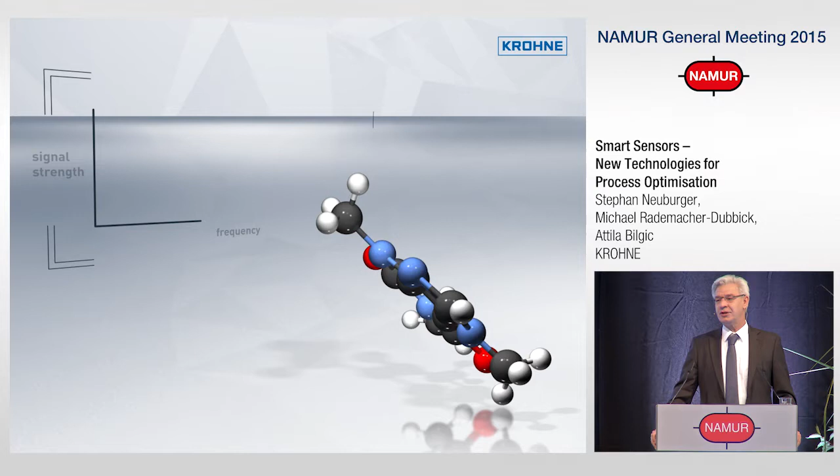In my part, I will present a short history of the development of the KROHNE Group from an individual instrument manufacturer to an international solution provider in the field of measuring technology. My fellow board member and spokesman of the owner family, Michael Rademacher-Dubbick, will then present our corporate philosophy. In the third part, our Chief Technical Officer, Dr. Attila Bilgic, will outline the technology of tomorrow in which we are conducting research and which are developing specifically for your application. You can already see an example of this in my background.

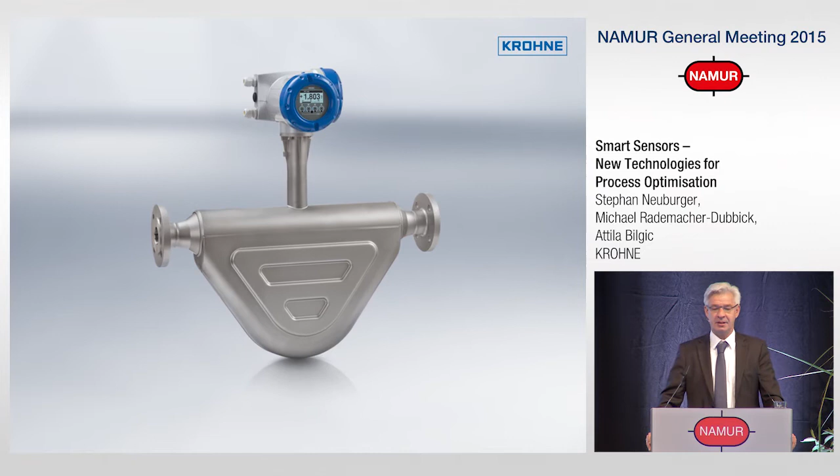I'm very excited about what lies ahead, and I'm confident that today's presentation will be very enriching. Attila certainly will surprise you. But one thing I can tell you already is that it has nothing to do anymore with only VA flow meters. Smart sensors, new technologies for process optimization, hidden behind this title, is actually the future of sensors for the chemical industry. But before we look into this future together, I would like to briefly talk about how we arrived at where we are now and how the subject of smart has already become well embedded within KROHNE.

The sensors of tomorrow will provide diagnosis, they will recognize information and network with each other intelligently and draw the right conclusions. Smart sensor technology is to a large extent application-oriented sensor technology, and you will hear the word application a lot from us today, because applications are what drives us.

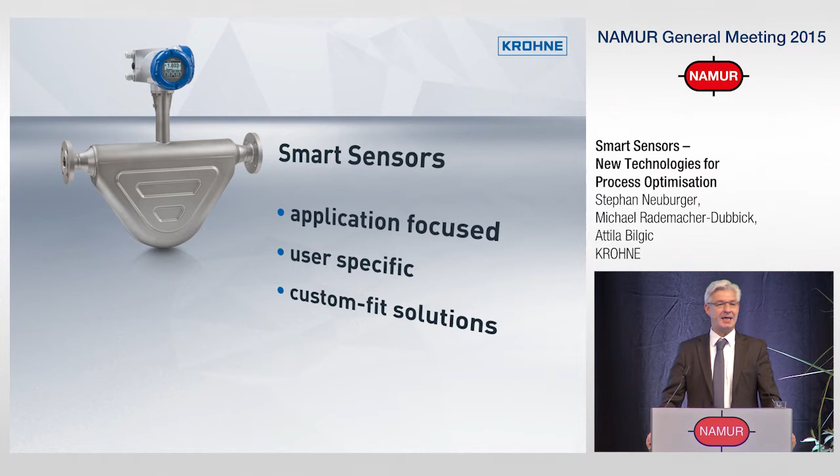From the beginning, our focus has always been geared towards the application and process of our customers. What makes our work so very interesting is the continuous creative exchange with our clients about their requirements. To find the custom-fit measuring solution for your application inspires us again and again, and we are known to be not afraid of very complex challenges.

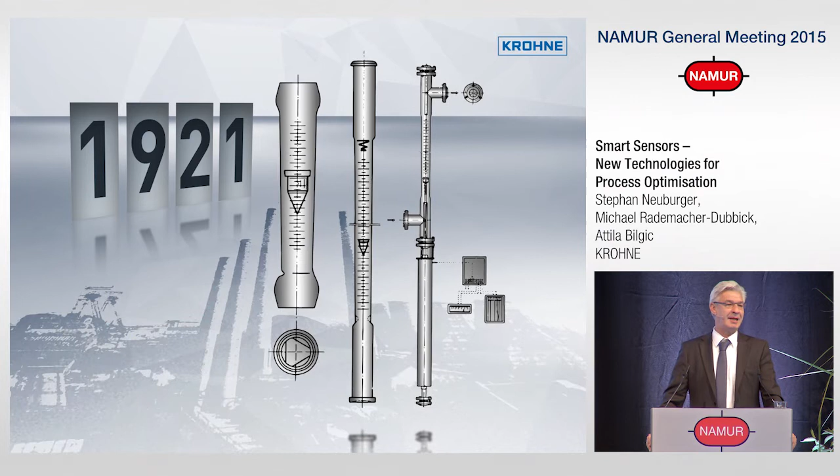We started in 1921 with the manufacture of measuring devices for hardening furnaces used by companies from the metal industry in the Ruhr area. After the upheavals of the Second World War, KROHNE was initially a small business when Christian Rademacher-Dubbick joined the company and gave directions for many decades. At this time, Christian was a passionate artist.

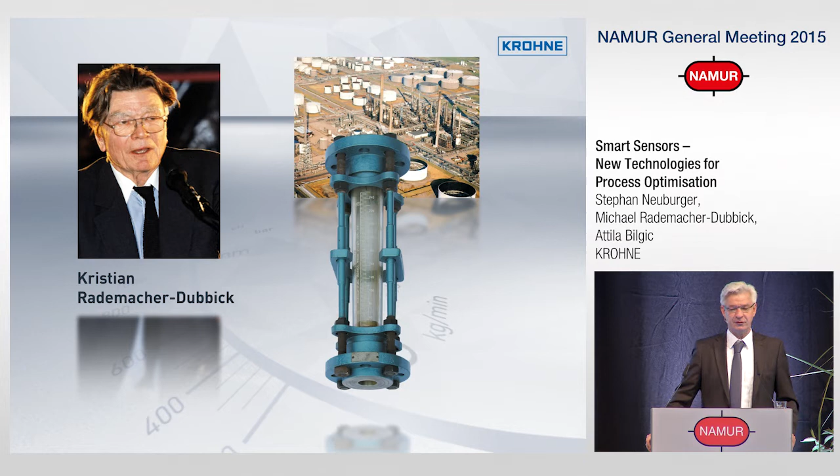However, he decided to swap his passion from painting with the technology of measurement. He dealt closely with the chemical industry in Germany, which in the 50s was experiencing a strong growth, and he wanted to understand what exactly was needed in measuring technology. KROHNE had to grow. Amongst others, BASF and Bayer became important customers and important companions.

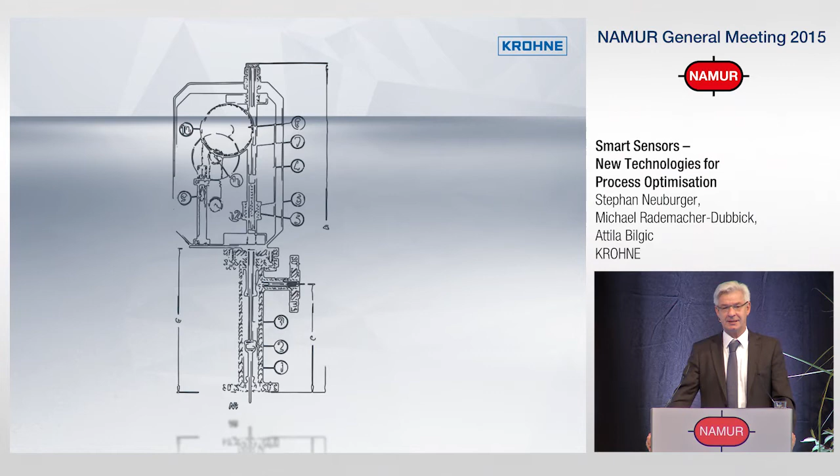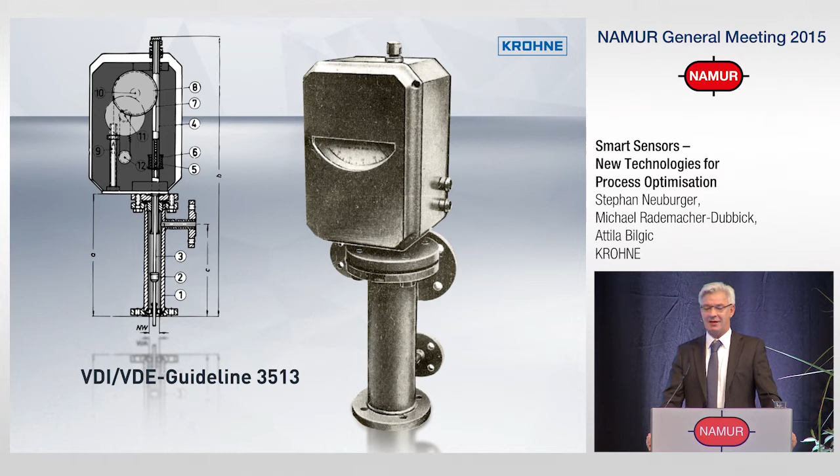We first implemented their requirements for standardized, safe measuring devices by our all-metal VA flow meters with magnetic coupling. The calculation procedure developed by KROHNE was a basis for the VDI/VDE guideline 3513. The principle of magnetic coupling also helped us to expand our product portfolio in the area of level measurement technology with a magnetically coupled float system under the license from Farbwerke Höchst.

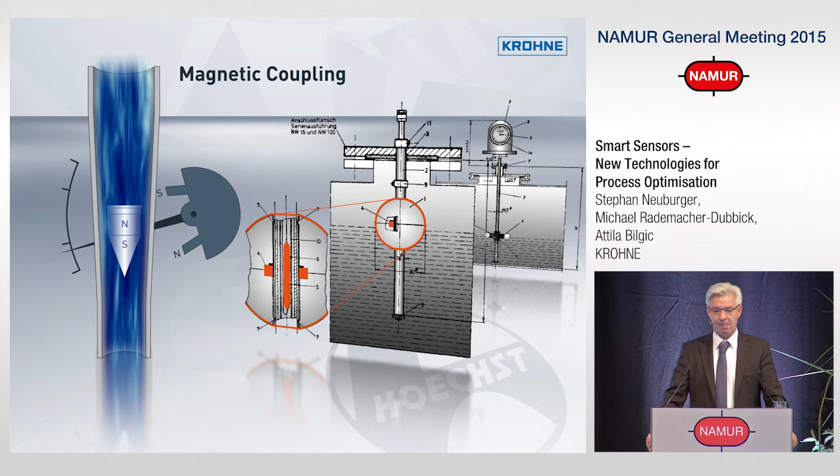The first electrical measurement principle that followed was our electromagnetic technology. Under the name KROHNE Altoflux, we took our first steps towards industrial standard electromagnetic flow meters. These devices contained no moving parts for the measuring in the volume flow, had no constriction, no pressure loss. Nothing like this had ever existed before.

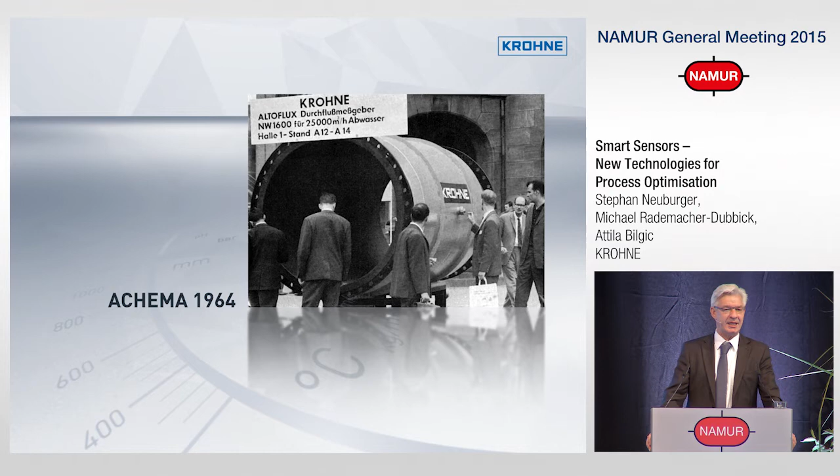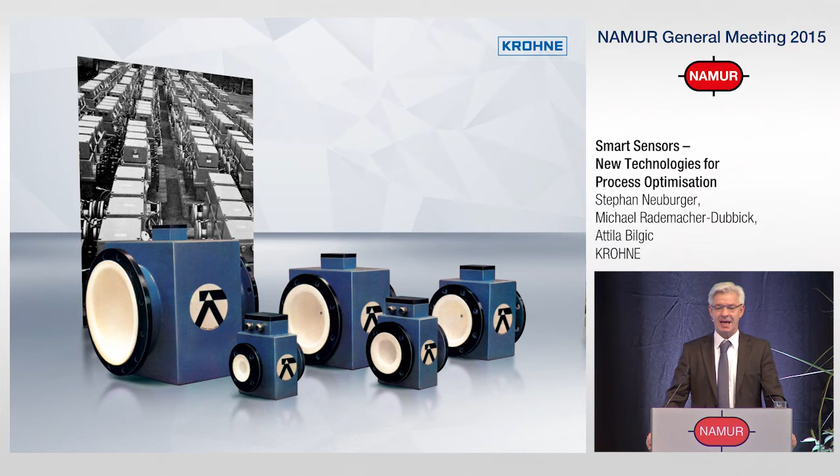The fundamental question was whether such a device could work. The industrialization of this technology was so difficult at the time that KROHNE wanted to give up the project on several occasions. With great tenacity, after 10 years, we finally got the technology under control.

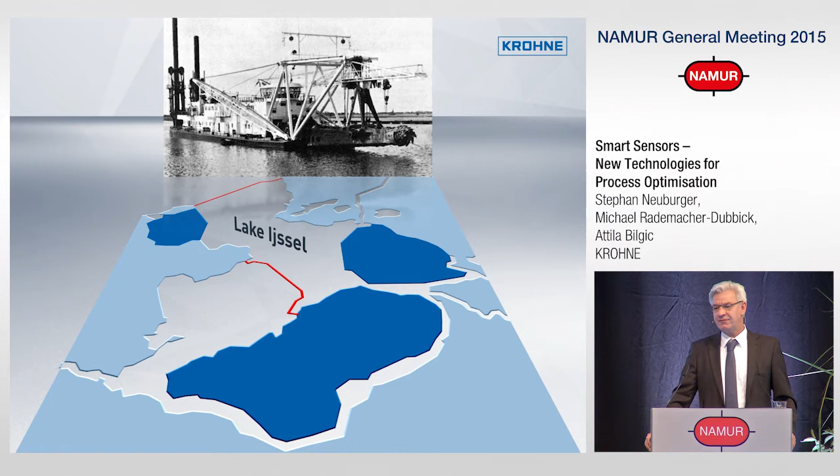The trust we received from our customers through the first orders for magnetic inductive flow meters helped us considerably. The Netherlands urgently needed a technology for land reclamation and construction of polders, which could measure the mixture of water, sand, and partly very large stones without being destroyed in the process. We successfully solved this application.

Since the market of KROHNE at that time was 60% concentrated on the chemical sector, especially the German chemical sector, our first task was to adapt the new technology for our traditional customers. The requirements in the chemical sector were a lot more diverse.

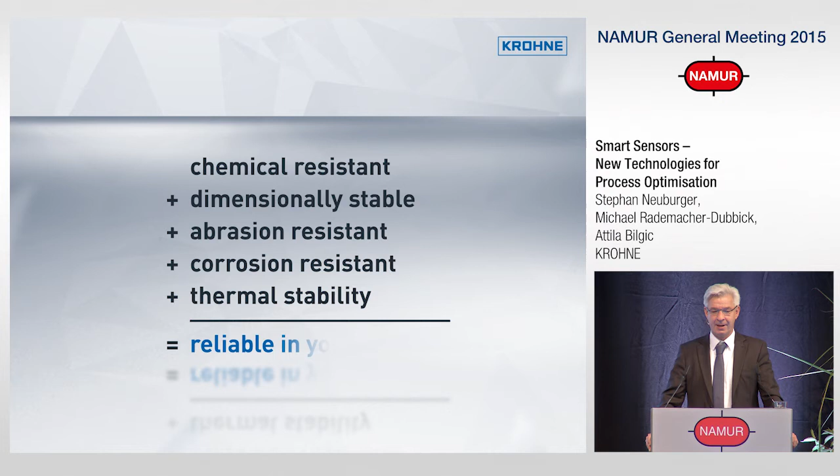We developed transistor amplifiers, the pulse DC field, large and small diameters, pressure ratings, various Ex concepts, and a huge number of liners. We wanted to give our clients the ideal measuring device for all their needs: chemical resistant, dimensional stable, abrasion and corrosion resistant, thermally stable, in sum, reliable in your process. The idea to use industrial ceramics as a measuring tube material came from KROHNE.

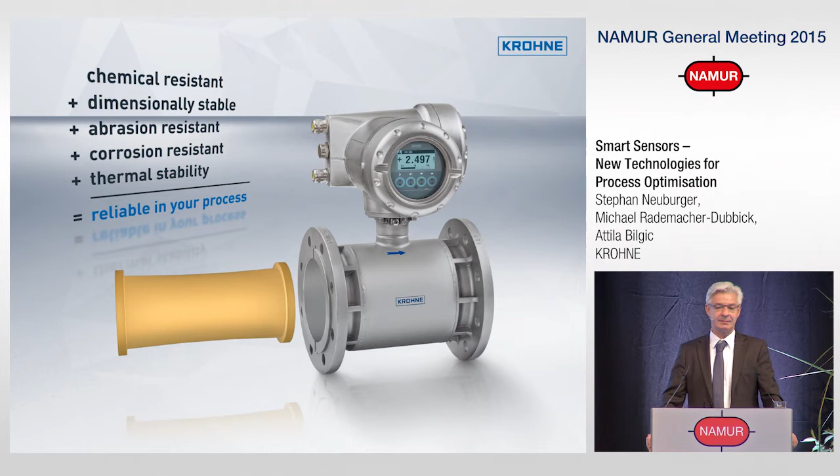Parallel to the chemical sector, we also acquired a broad range of application knowledge in the petrochemical industry, the food sector, and the water and wastewater industries. We have consistently researched new technologies and integrated them into industrial measurement technology, and we have often pioneered the industrial implementation of further physical effects.

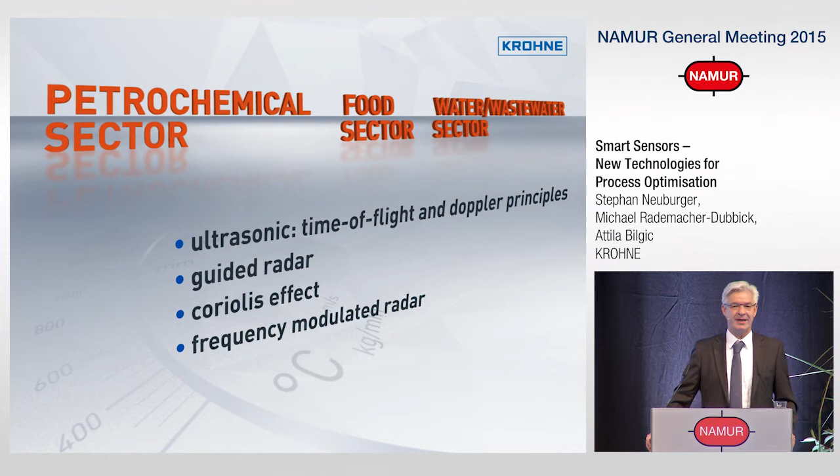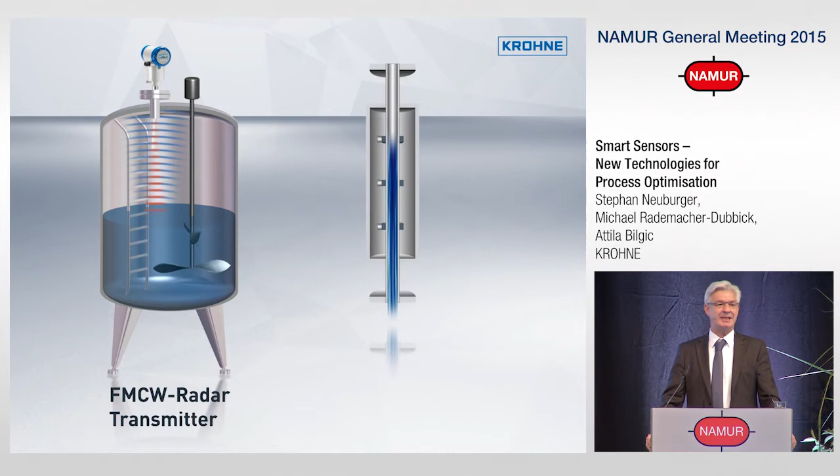Non-contact, frequency-modulated radar for level measurement in difficult vessel geometries, or the direct mass flow measurement using the Coriolis effect with a single straight measuring tube, are just two examples. From the mechanical design to the electrical signal evaluation through the measurement algorithm, we have complete command of our technologies.

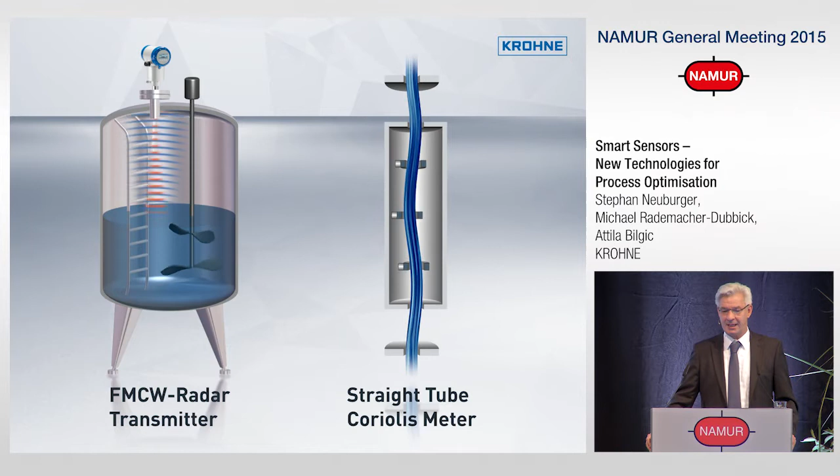In addition to the development of these technologies, the second important task was the internationalization of our company. One important motivating force for us was the high level of investment from the NAMUR member companies abroad and their wish for a reliable local partner.

Sometimes the wish was expressed in a very direct way, and I would like to give you an example from my own first-hand experience. In 1996, I was a region manager responsible for South America. At the invitation of the German Trade and Industry Association, I was invited to a dinner in Sao Paulo, where I had the pleasure of presenting KROHNE.

The evening went well up to the moment at which one of the audience members, a manager of a large German chemical group, took me aside. He made it very clear to me that simply exporting devices was not enough and that business in South America would not be successful this way.

We would need people on the ground who are involved in the application and are able to establish long-term relationships with our clients. Following the principle of local business, local people, we have built up our global development and production sites, as well as our sales organization in North and South America, India, China, and Russia.

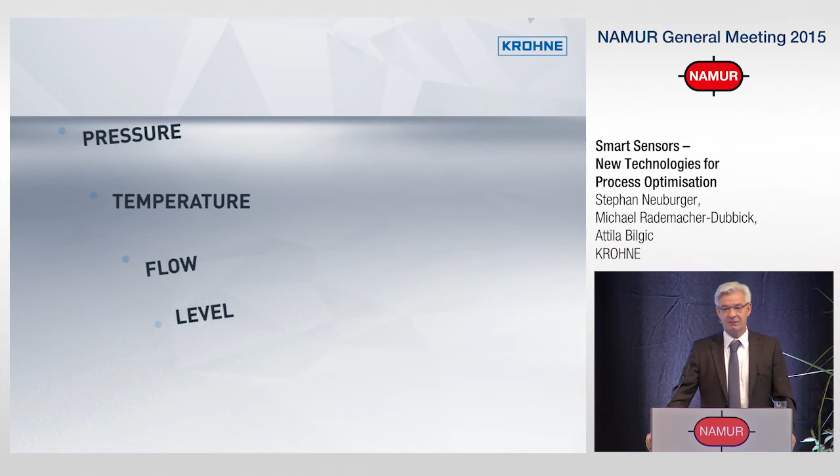4+1, that means process analytics are placed on the same level as the main parameters mentioned before. We have mastered all of these technologies in depth. Only in this way can we guarantee the implementation for your application and the integration into your process.

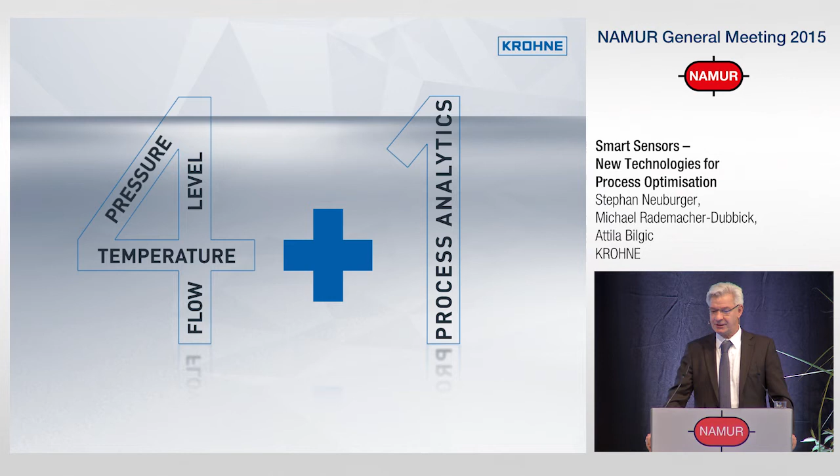With the development of our process analytics portfolio, we have continued to focus on the requirements of our customers. Process parameters such as mass flow are now supplemented by substance composition. We measure inline, online, and the results are real-time available for the process control system. To gain material-specific information inline or online is a substantial competitive advantage for chemical companies.

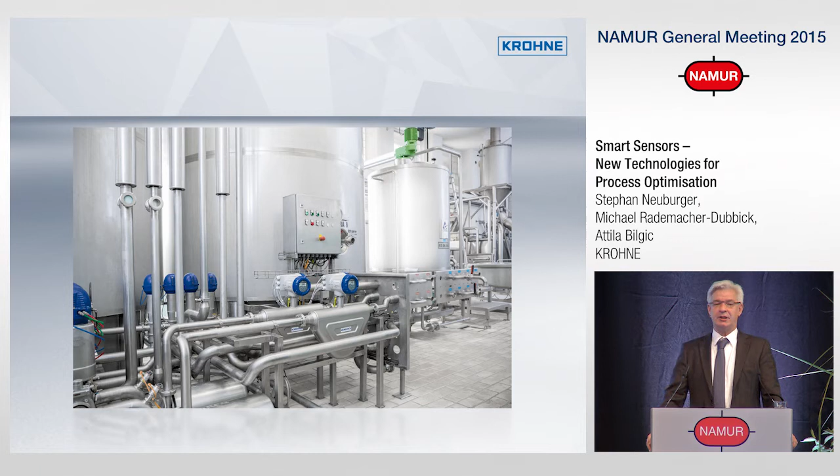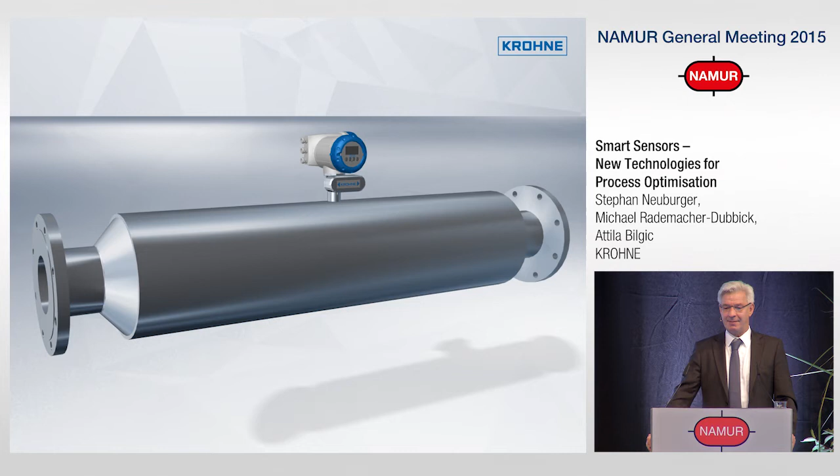We can see that the market demands this from us, and we will expand our involvement in this area in future, as you will see in Dr. Bilgic's presentation. Next to a first-class product portfolio, you also expect from us a complete and appropriate measuring solution. I would like to give you two examples.

In the first example, we develop a measuring run as a solution for the custody transfer loading of rapeseed oil. We supply everything shown here: the gas separator, control valve, mass flow meter, piping, the dosing control, and the custody transfer relevant project management, complying with the regulation of the MI 005, as well as the commissioning, training and documentation.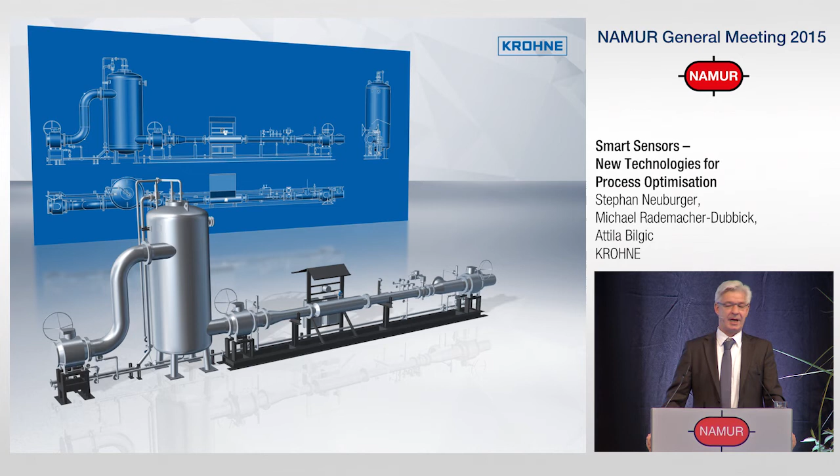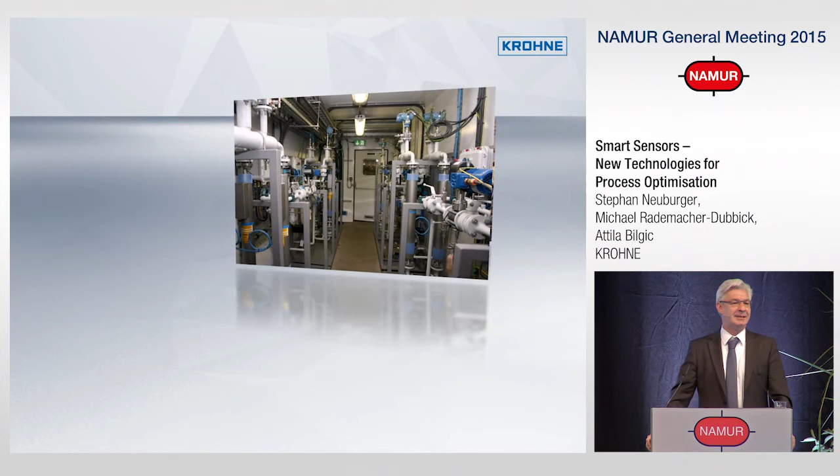The second example comes from the oil and gas industry. Next to excellent measuring devices, they also expect a complete metering solution: a turnkey, skid-based measuring system, mixer, analyzer house, custody transfer flow meter, actuators, and the integration of measured data into the customer's ERP system. We have the expertise to advise our clients early on in the planning and design stages of this solution.

Furthermore, we support our clients in the decision-making process while determining which application is subject to custody transfer or fiscal regulation and which is not. And if applicable, we support you in the custody transfer approval process.

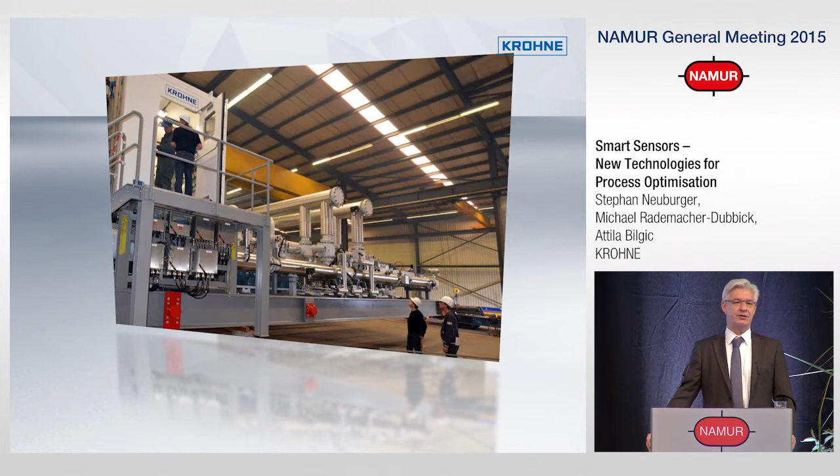In the implementation of the European Measuring Instrument Directive, I just mentioned the MI-005 as an example. KROHNE supports its customers in the total process assessment and upgrading of existing installations according to national metrological regulations. In doing so, KROHNE is becoming a service provider beyond the plain measurement value.

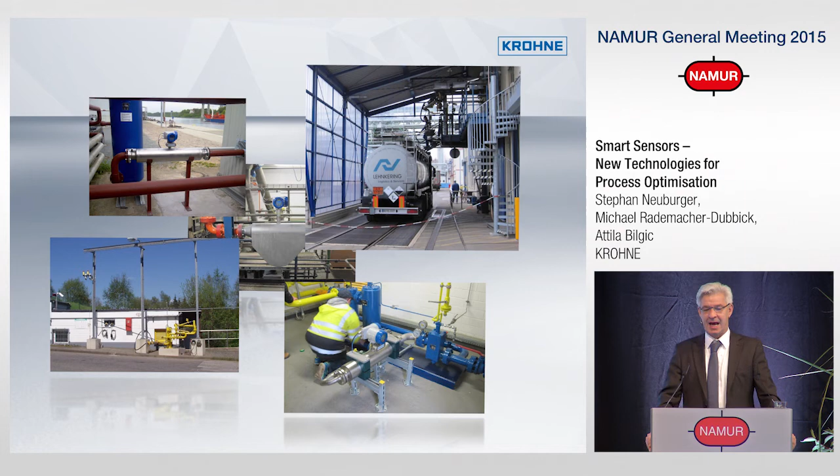Whether that be for a process measuring device or for a complete system solution, precisely understanding and implementing customers' requirements is our task. Safety, availability, flexibility, and efficiency, the core needs of the chemical industry, are second nature to us in the way we think and in the way we act.

We show you how you can simplify safety concepts within your plants and how you can ensure higher plant availability through diagnostic and predictive maintenance to minimize downtimes. Or, for example, in multipurpose plants, devices that can be used for a wide range of applications are necessary to utilize the maximum flexibility of that plant.

Today, a standard device needs to cover a temperature range between -200 to +400 degrees Celsius, be made from high-quality material without special versions, and at a competitive price.

Our contribution to an efficient process is not only limited to the provision of one measurement data, but on the structured deployment of large amounts and varieties of information out of your process.

Ladies and gentlemen, you want to have access to in-process data and trends, to product properties and information on the various phases and transition states in a safe and reliable way. The measurement technology solution for all of these tasks in future will be combined into a single measurement module.

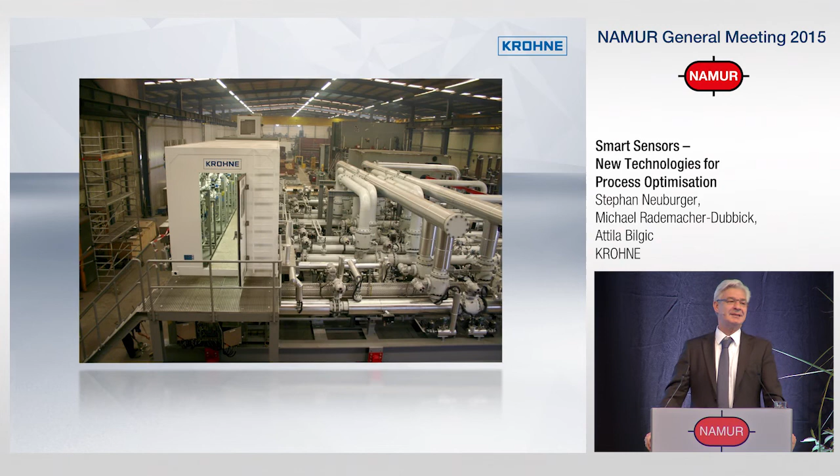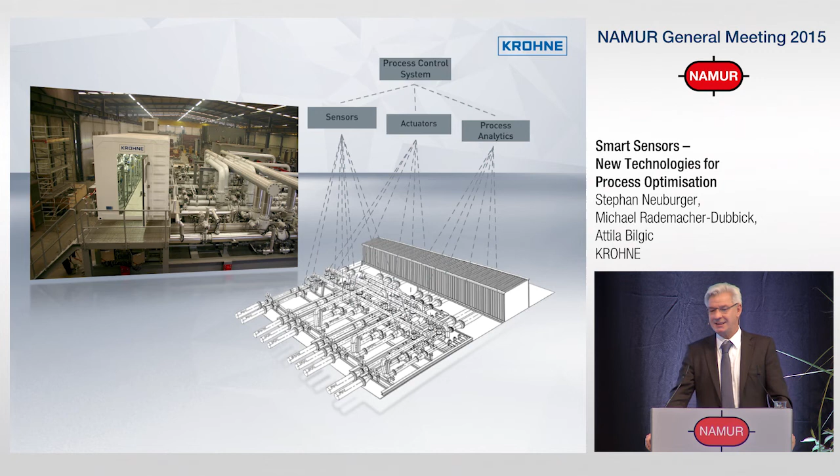The future of process automation is an instrumentation and control module which intelligently connects sensors and actuators combined with the necessary process analytics. The forefather for such a module is a system solution that combines various functions with one system.

This path directly leads us into the world of Internet of Things, or Industry 4.0. If we reduce such a system in size and interlink this function intelligently, we create a smart instrumentation and control module.

The functionality of such a module can only be guaranteed by smart sensors. Sensors with reliable diagnosis and intelligent linking between sensors, actuators and control systems are the future. Whether the process control system in its present form is still required is an entirely different question.

Another example of a smart system is our leak detection and localization system. This system continuously compares the measured data of the inline sensors in the actual pipeline with a mathematical model of this pipeline. Any deviation from the model is detected as a leak or as safe via pattern recognition software.

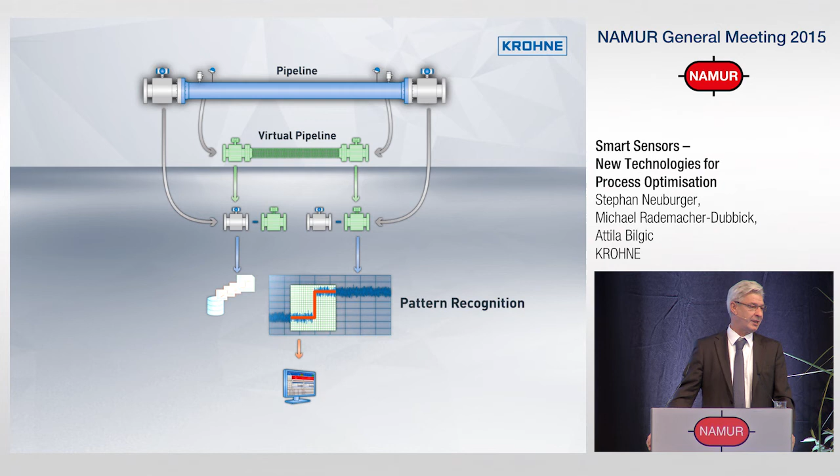The intelligent combination of sensors and software works so well that the false alarm rate of the system is practically zero. This system is already providing completely autonomous intelligence which, according to the wishes of the customers, can be integrated into a control system or remain standalone.

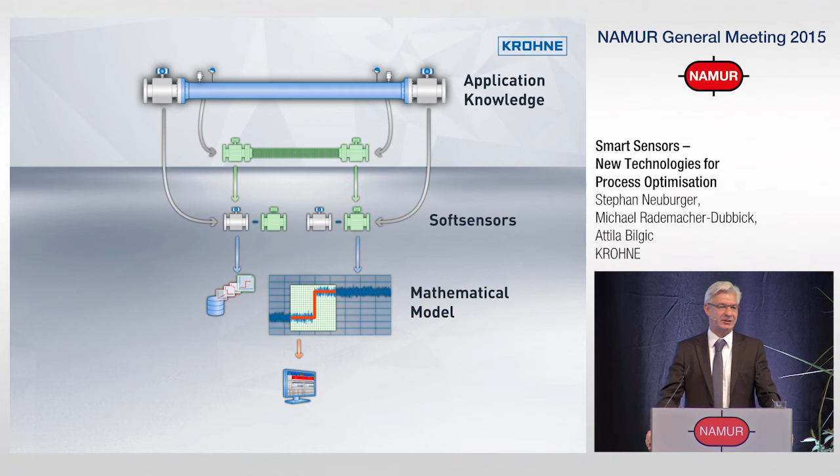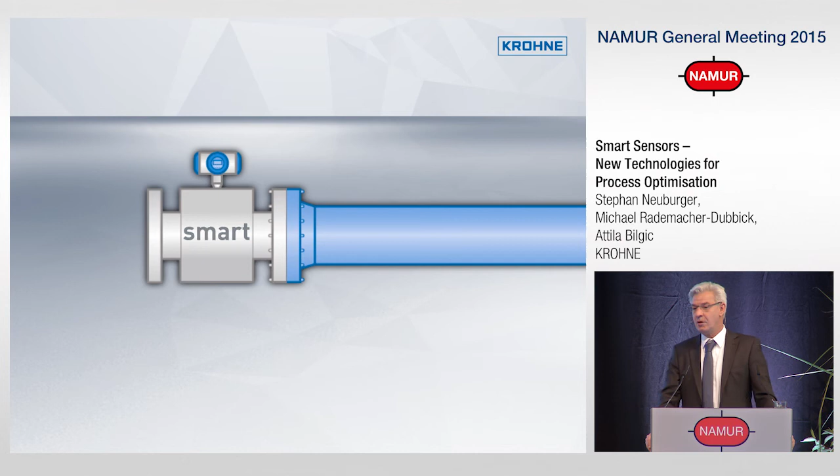This intelligence, the mathematical model as well as the pattern recognition, can be integrated into our sensors in whole or in part. In this respect, our measuring technology is already smart. Such an interlinked system of soft sensors and mathematical models of the process control, combined with the necessary application knowledge, will set the future in process automation.

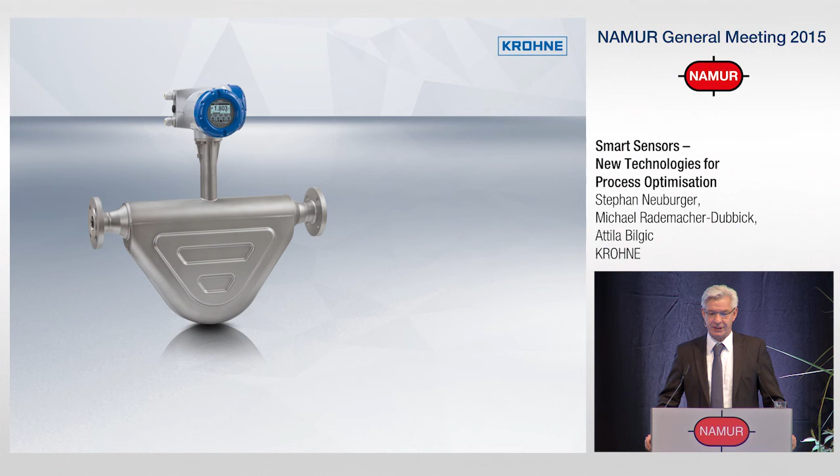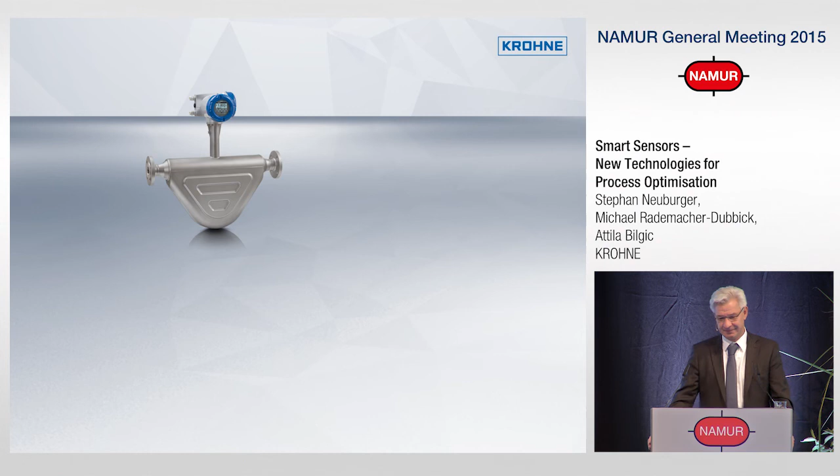At the same time, smart sensors must fulfill exactly the same requirements as a so-called regular process instrument: reliable measurement data under the most difficult conditions that meet international standards and regulations, comply with all safety aspects, and integrate modern communication technologies.

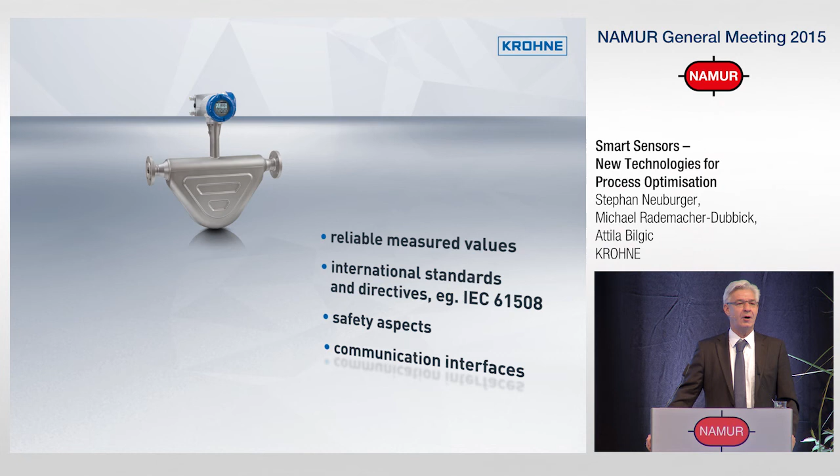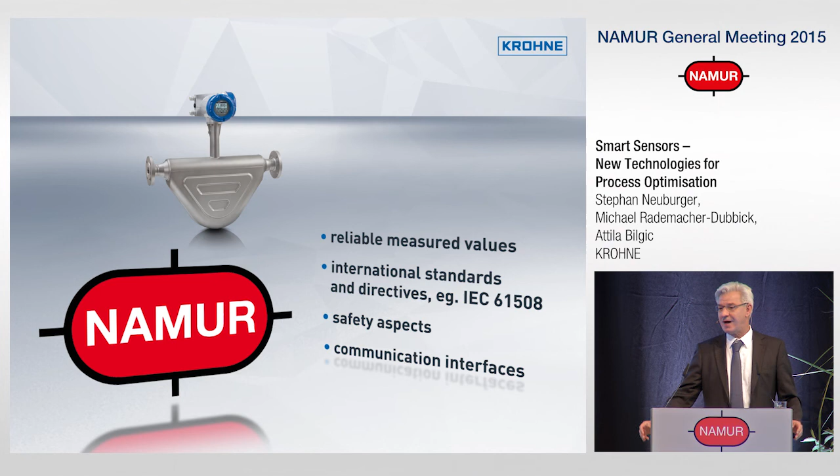In this context, we welcome the standardization efforts by NAMUR, because only uniform, open standards will lead to increased efficiency of your plants. Nonetheless, the number of NAMUR recommendations remains quite impressive for us.

We are already implementing key aspects from the NAMUR roadmap, Process Sensors 2015+. For example, in the measurement of spatial distribution of process variables in your pipelines and vessels using tomographic methods. Interface detection through inline process analytics and the use of new concepts are also important.

Examples are single-use sensors or swarm sensors. We are very much looking forward to the revised version of the roadmap that will be presented by Dr. Michael Maiwald later this morning.

The entire field of smart sensors, in conjunction with the paradigms of chemistry, requires a huge effort on our part as a measuring technology manufacturer.

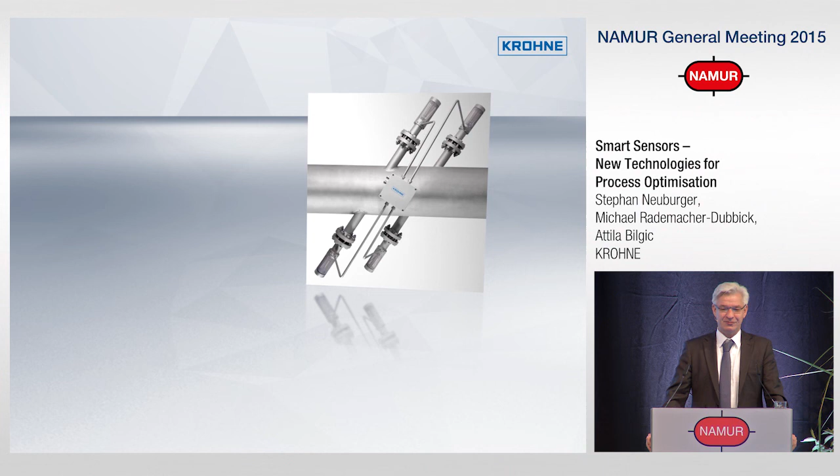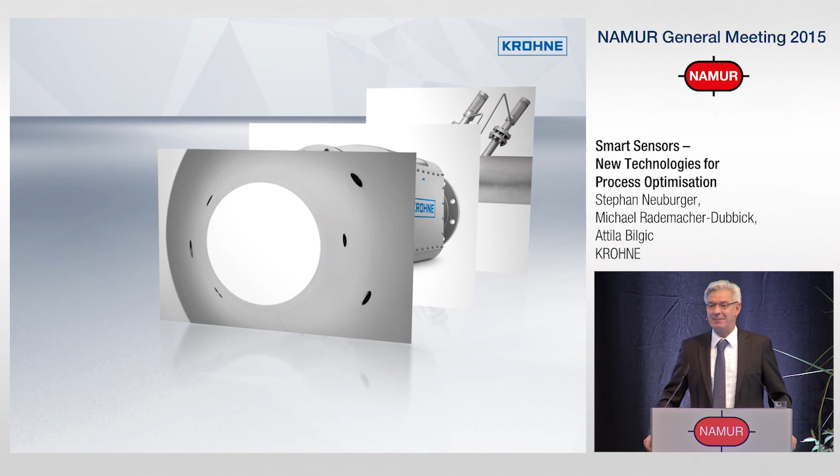Actively shaping this future calls for significant commitment, especially in the field of research and development. These projects, besides their enormous potential, also represent a considerable risk. The investment needed here can be seen as risk capital.

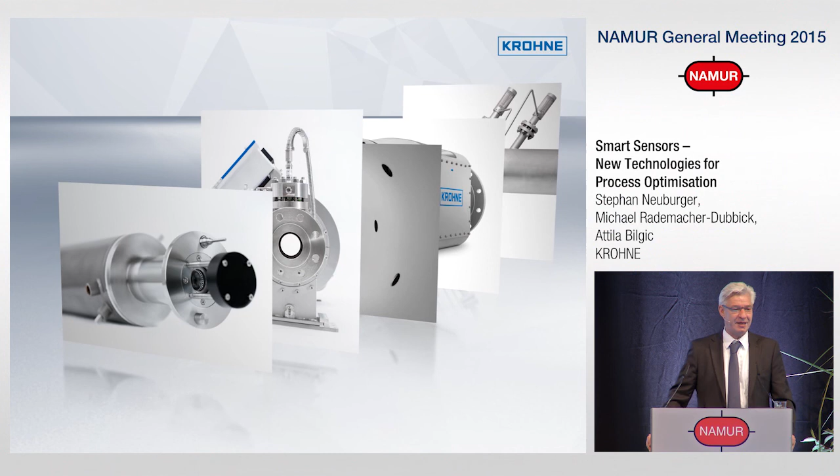As a company, we are prepared to deploy this risk capital and are grateful that we can rely on the full support of our owner family. Family-owned enterprises have their own strengths and values.

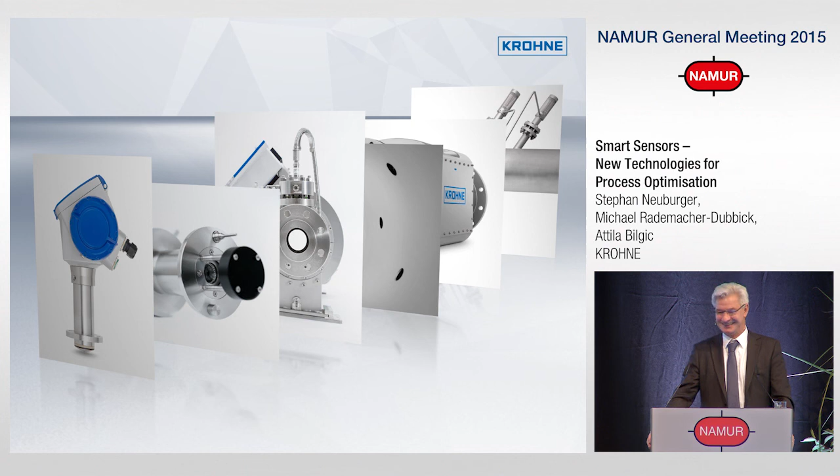I'm sure my fellow board member and spokesman of the owner family, Michael Rademacher-Dubbick, can explain this much better than I can. Michael, would you please join me here on the stage before I briefly summarize the four most important points for the audience?

Today, KROHNE is a global company which has always focused closely on the applications of our clients. KROHNE is developing from a pure hardware manufacturer into a measuring service provider. Smart measuring modules combined with detailed application knowledge will determine the process automation of the future.

Our structure as a family-owned enterprise enables significant investment in new technology. At this point, I would like to hand over to you, Michael.